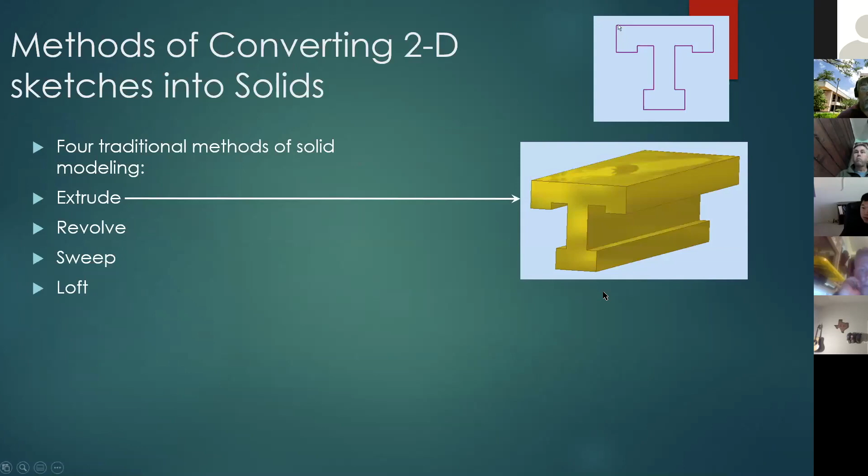With any solid modeling program - I don't care whether you're using Fusion, Inventor, SolidWorks, whatever else you might have run into - there are basically four methods of putting things together. Either you start off with a block T and just stretch it out straight, which is an extrude. You take it and swing it around an axis to make a revolve. You take it and let it follow a path to sweep things out. Or if you have two different shapes - you want to go from a block T to, in this case, a circle - you can use a loft function.

Probably that's in order of frequency that you run into things. Lofts are really useful when you need them, but there are not a lot of parts in the engineering world, at least, that require lofting. Airplane wings, boat hulls, things like that that are

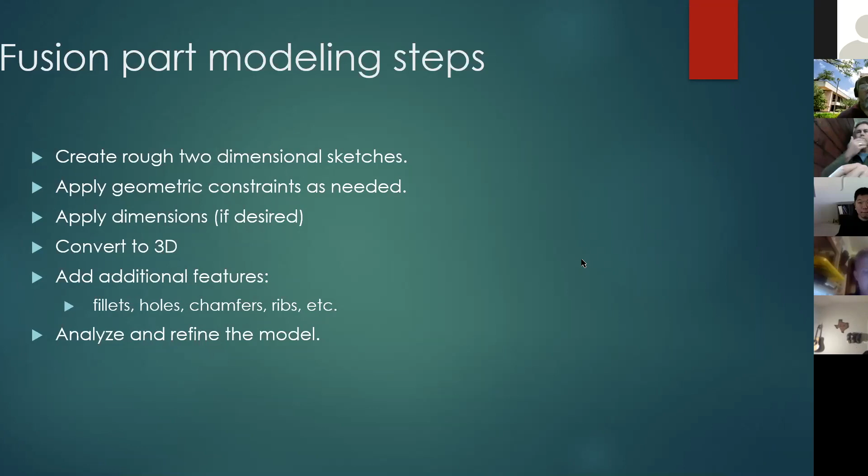defined by cross sections are your most common application for that. The way it works, you're going to start off in Fusion and you're going to draw that block T, whatever it is. You're going to draw a two-dimensional sketch and then constrain and dimension that so that everything comes up the right size. So it's a process of identifying this sketch, dimensioning it, constraining it, converting it to 3D, and then just building on from there, right? Adding more extrudes, revolves, drilling holes, filleting corners, whatever it may be.

So when you first start off in Fusion, you're going to look at what you're trying to draw and you're going to say, where do I want to start drawing this thing? Because I'm going to start with that two-dimensional shape and then extrude, revolve, sweep, or loft it. So where's the best place to start? And the answer is not always absolutely identifiable.

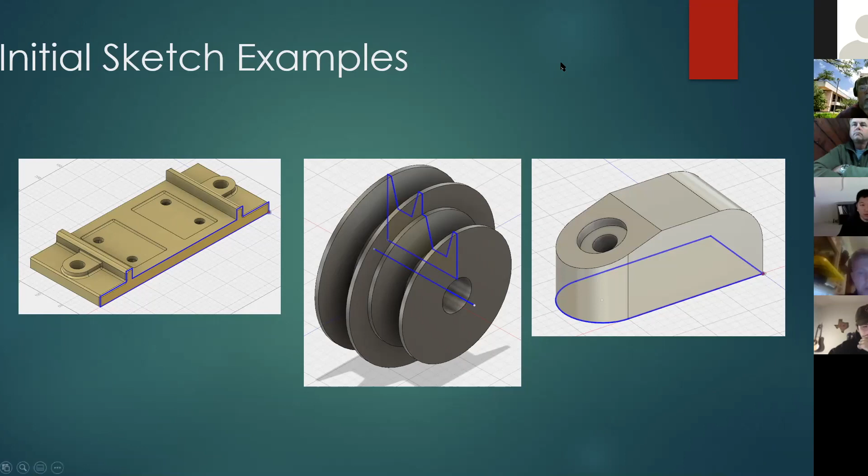When you get into Fusion, the first thing you're going to want to do is to start putting a sketch together, right? If we go over to Fusion, how far down is Fusion? There. If we go over into Fusion, the first thing I'm going to want to do is to put a basic sketch. So I create a sketch. This is the launching point for pretty much everything that you're going to do.

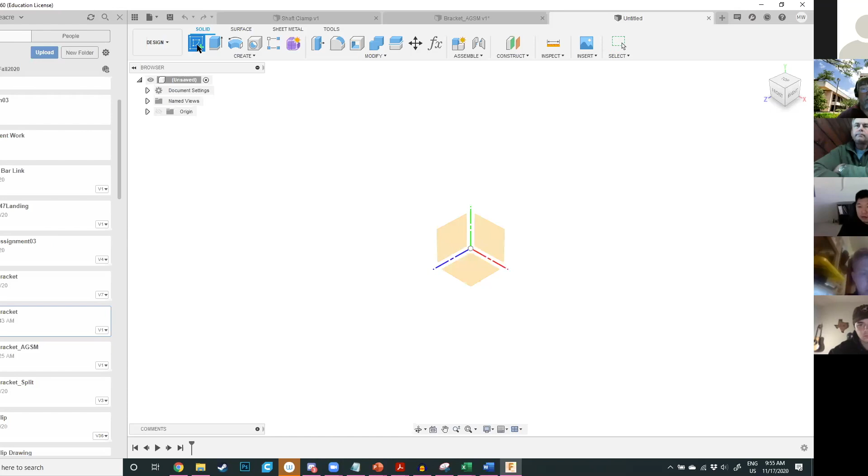You can choose what surface you want to start on. Fusion will allow you to sketch on any planar surface that exists in your design. Right now, there are 3 of them, right? The frontal, the profile, and the horizontal. And I can pick any one of those 3 to sketch on to do my initial sketch.

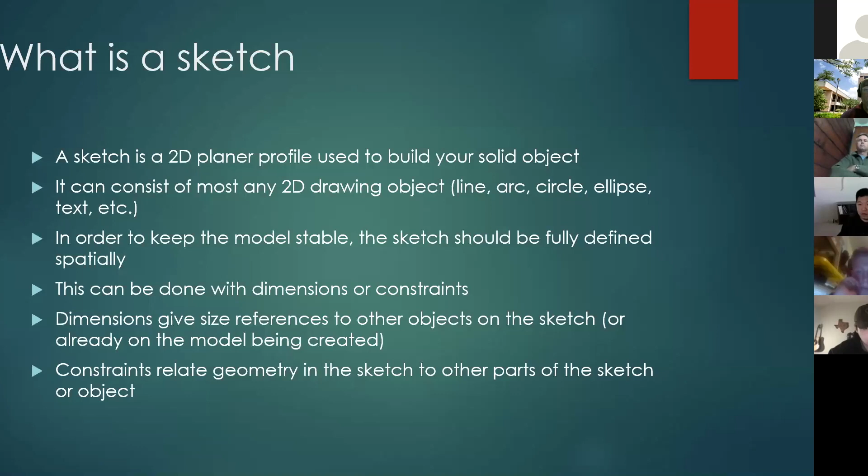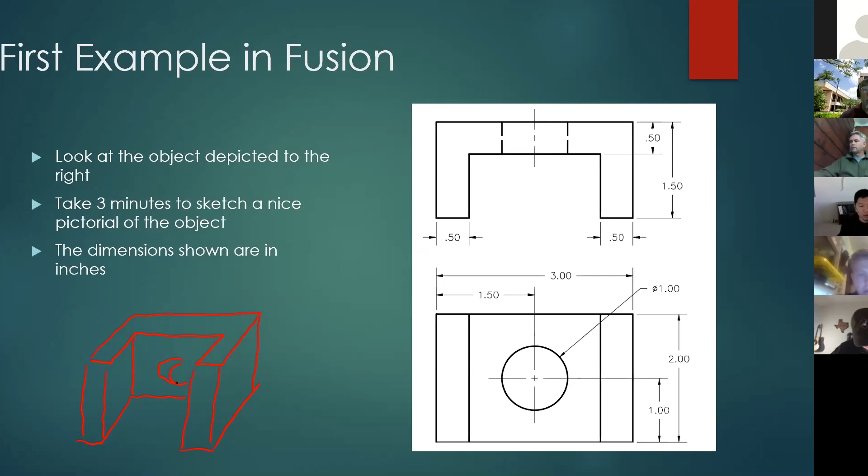So the question is, how are we going to get Fusion to generate that thing? So we look at this and say, well, where's the best place to start? In my opinion, the best place is the top view, right? So we're going to start off and look at that U-shaped region there in the top, drawing that thing out

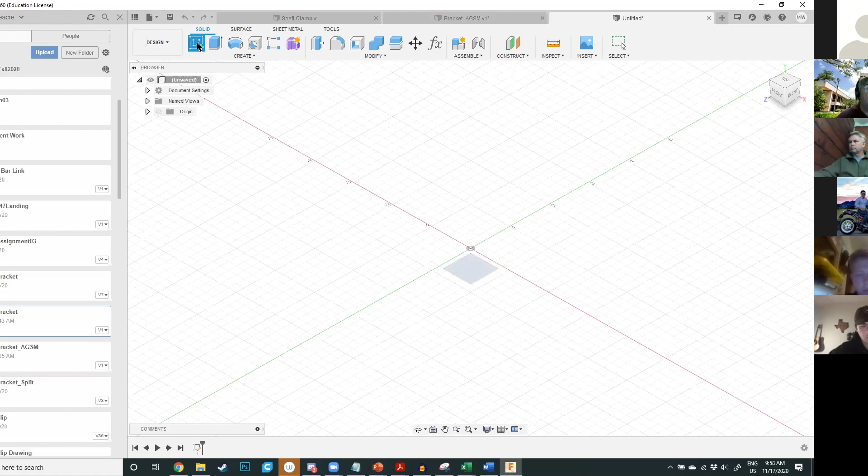with those dimensions. So we go over to Fusion. We're going to start a sketch on the horizontal, the top, right? Then we're going to draw lines that are depicting that basic shape.

And you notice I'm not trying to be real careful to make sure I drew it the right size. That frustrates some people no end. But the way a parametric solid modeling program works, once I get the basic shape, you'll see some of the lines are still blue. Those are not well defined.

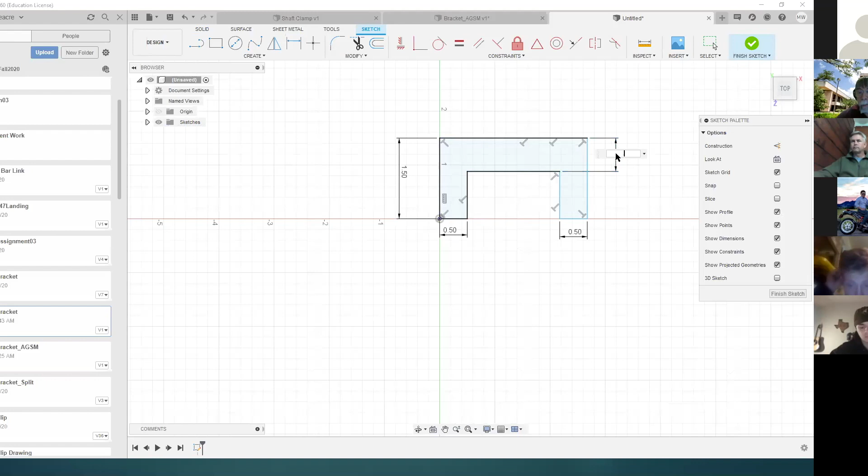I can add dimensions and say, well, gee, this thing was supposed to be 1.5. Now it knows where that top line is. This was supposed to be 0.5. This was supposed to be 0.5. From there to there was supposed to be 0.5. And the overall size right there was supposed to be 3.

It looks like it's all well-defined, everything is happy, and you know exactly how big it is. And you check for things, and all of a sudden you notice there's this one blue line down here, because no one told it where that had to line up.

I can either go in and put another dimension on this side and define that also as 1.5. Or I can come in here to my little section called constraints and tell Fusion that I want 2 lines to be on a line with one another, collinear between this one and this one. So they'll all line up at all times.

That gives me a basic sketch. It's just a U shape, 1.5 by 3 with 1/2 inch edges. Once I've got that sketch done and I'm finished with it, I will finish my sketch.

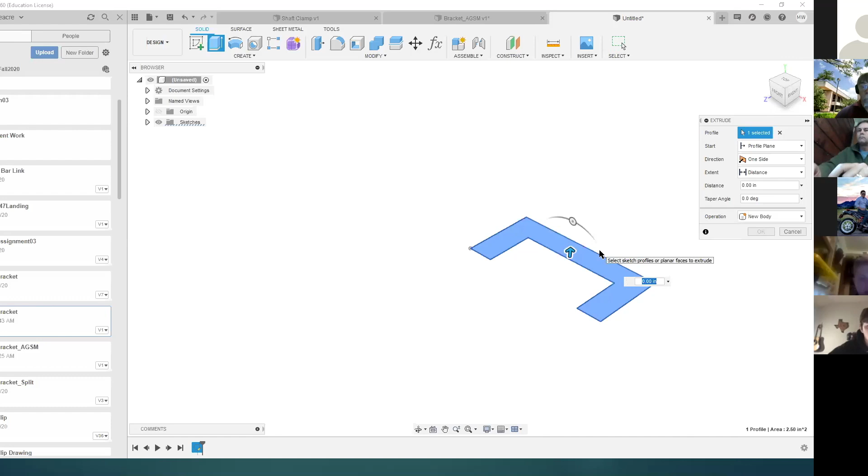My operations for turning things into 3D objects, there's extrude, there's revolve. Others exist underneath here. If you drop that down, there you can get sweep, loft, rib, web, etc. But if I just say extrude, bring that thing up 2 inches, drag these pretty little pictures out of the way where I can see what I'm doing, and say, okay, I've got the basic structure of that U shape.

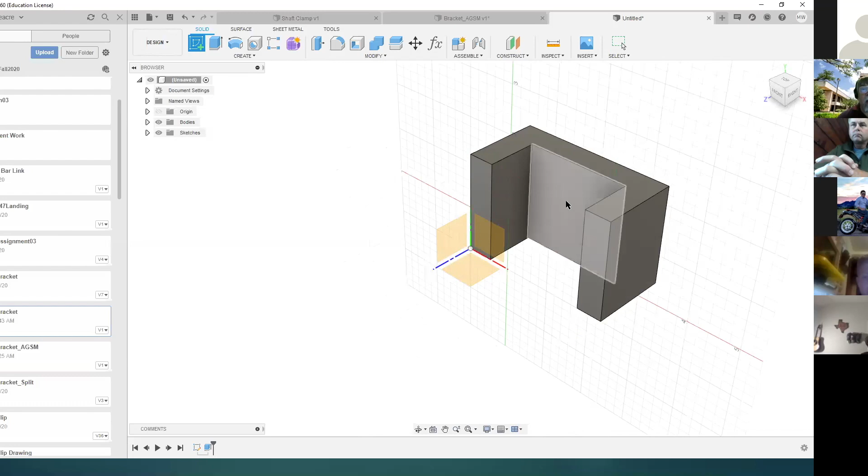I say, well, okay, that's taken care of. Now I want to drill a hole. There is an actual tool to make holes. For the moment, I'm going to skip over that and just do this as a second sketch. I'm going to create a secondary sketch. I could use any of those 3 standard surfaces or any of the existing surfaces in my object. I want to use the back of this block.

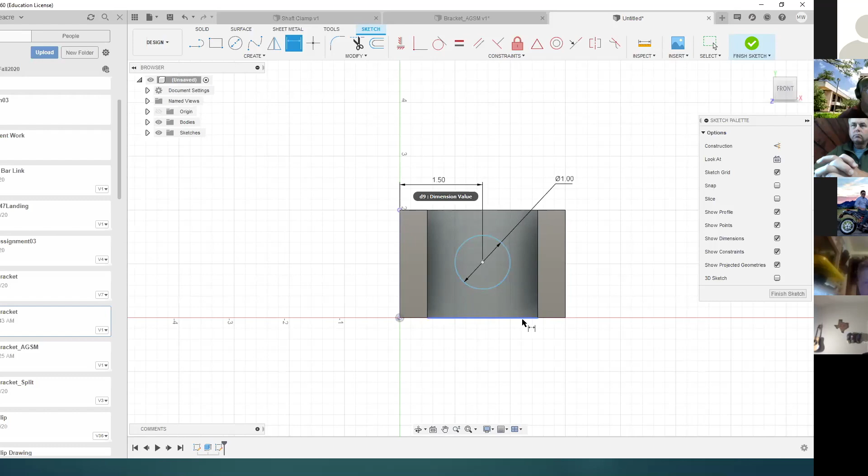I want to draw a circle on the back edge, dimension it at diameter 1, from one edge to here should be 1.5, from the bottom to the circle should be 1, and I've now centered that on that back face. It's black, everything is well defined. I finish that sketch.

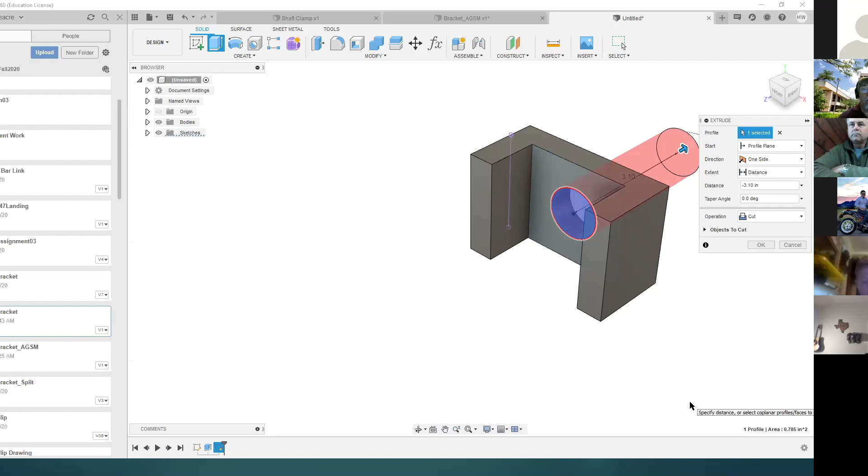I extrude that circle. If I were making a post to stick out of it, I'd bring it out this way. If it's to be a hole, I bring it out the other direction. Fusion is generally smart enough to know which one you mean. If for some reason it gets confused, I can change the operation from cut to join and turn it into a post if necessary. And then say OK. And that's your basic object. That's your first drawing in Fusion.

Fusion makes it very easy to go in and do things. If I take a second and kind of look around, on my left here, I've got what's called the browser. Each thing that I sketched shows up as a separate entity on the browser.

So if someone came in and said, hey, that 1-inch hole was supposed to have been 1 1/4, if I double click on sketch 2, I can double click on my dimension and it enlarges the hole. If someone comes back and says, well, gee, it was supposed to have been 2 inches deep instead of 1 or 1 1/2, I can change that.

I have access to all those dimensions. So later on, when someone comes and says, you know, you got that wrong, you don't have to say unfriendly words under your breath about them. You can just say, oh, fine, I'll take care of it, right?

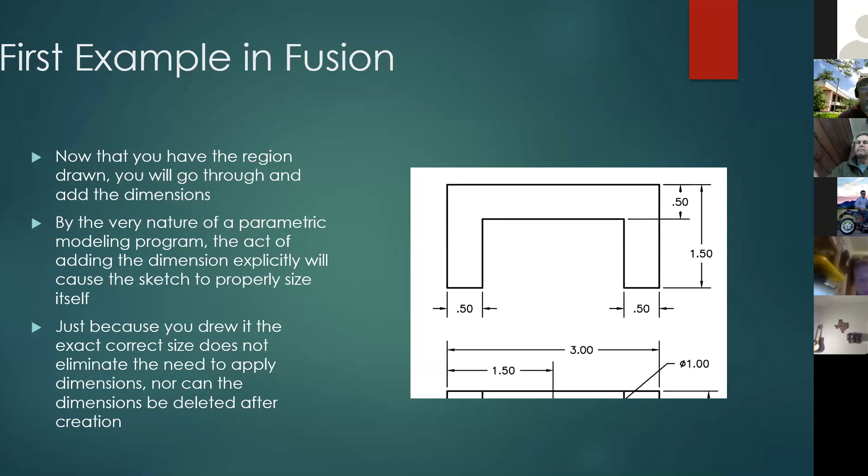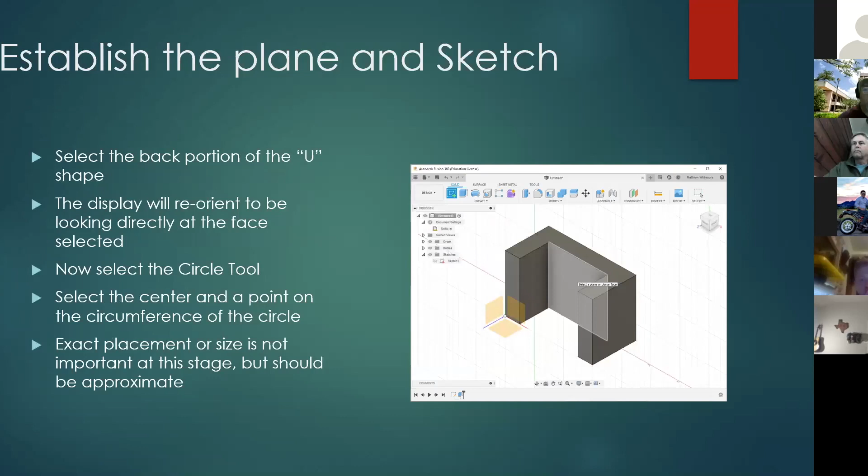That's your first part in Fusion, right? That's how Fusion works. Right?

If you want to interrupt, I vaguely watch the chat, but I have no objection to someone unmuting and saying, Mr. Whiteacre, could you? So feel free to interrupt me. This is a 400 level class, so you all have been here a while. You understand the concept. If you let a professor get up a head of steam, you'll never get a word in edgewise. So feel free to try to interrupt me if I lose you somewhere.

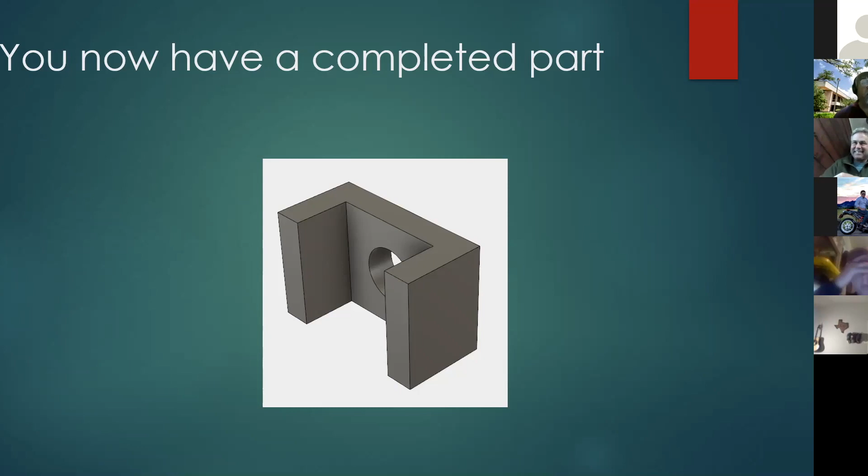So Matt, how would you display the dimensions on that? I mean, that's a beautiful drawing. If they want to display that with the dimensions shown, how would they do that? That's about 10 or 12 slides down the presentation. Excellent. So if you'll hold the question, I've got the answer to that. You have to go into a separate mode and create a drawing of it. Right. Oh, it's not even 10 or 12. It's next, drawings from 3D models. I thought I had one more example in here.

But as Colonel McGee says, how would you actually turn this into something that's useful for a drawing? If you've got this thing built in 3D, but you want to put it on a sheet of paper, which is 2D, I suppose you can always do a screen capture of that object and paste it in a Word document and make a pretty picture. But that's not really a technical drawing, and it doesn't show you the dimensions and all that good stuff. So we talk about creating drawings of it. There is a whole separate mode to create drawings.

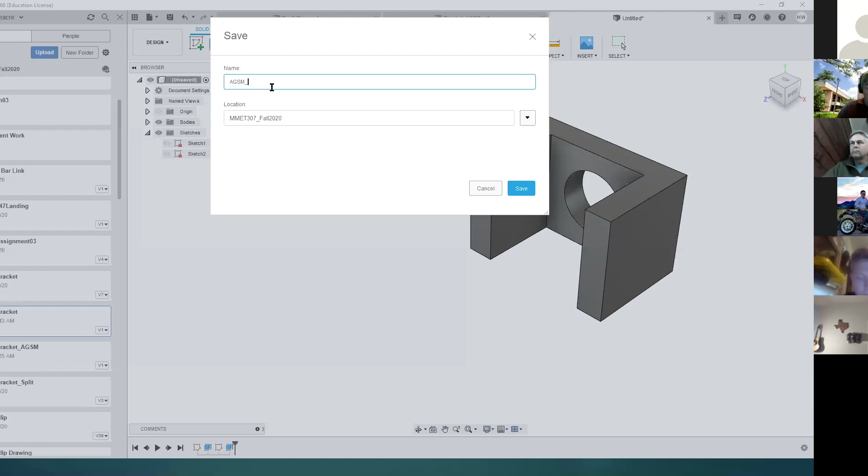Once I've got my part modeled, if I go into drawings, I have two choices. One is from the design space right here on screen, or there's an animation mode: if I have an assembly and I want to explode components, I can explode them and do an animation. We're not going to see that today. I just don't have time. But if I do from design, oh, it requires it be saved first. Save your part as something or other. Then it'll let you make a drawing of it. Either what's visible, select what you want, or do the whole thing. It doesn't really matter.

What standard do you want to use? ASME, American Society of Mechanical Engineers, is pretty much the American standard for how you're going to arrange top, front, right side views. ISO is the international standard. ASME uses third angle projection. ISO uses first angle projection. It depends on who your target audience is. I'm used to working ASME, so that's where I'm going to set it. What units do I want to use, and what size page do I want? 8.5 by 11, whatever. And say okay. And Fusion's going to buzz and whirl for a minute.

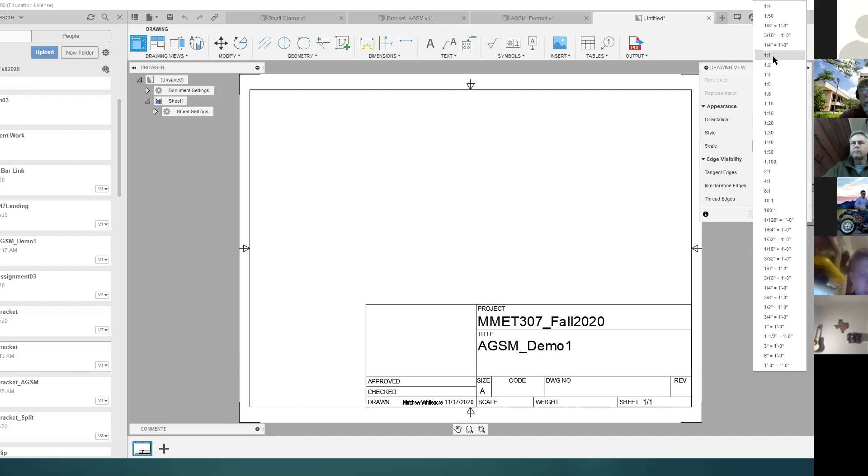Bring up a sheet of paper, draw a border with a title block on it. Bring your object up and say, where would you like to put this? If you go, well, I'd like it a little bigger, a scale of 1 to 1, or a little bit smaller, a scale of 1 to 4, I can control what scale this thing's going to be drawn at, where it's going to go, and then just say okay. Fusion creates that view.

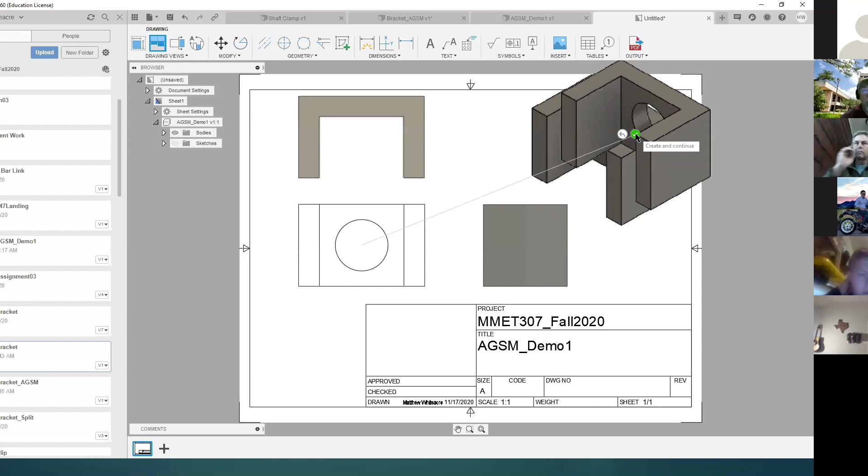A second view is a projected view. So I go into my projected view, I click the parent and say, bring one up here, one over here, and a pictorial out there. I made it bigger so it's not going to fit so nicely, but that's okay. Click the check mark or hit the enter key, and it will generate those views. Fusion is smart enough to know when something should be a hidden line, when something should be a visible line. It unfortunately assumes the pictorial should also be visible and hidden, and that's not very normal.

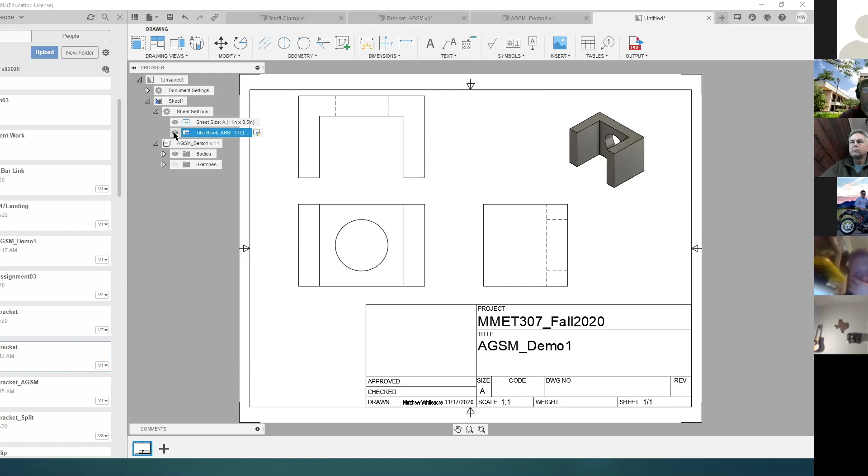So you probably want to right click and go into edit view, edit the pictorial and say, let's make that one shaded. Or if you like line drawings, make it a line drawing, but don't show hidden edges. And since it's a pictorial, I can scale it independent of the orthographics, and then everything fits. If you don't want to show your title block, in sheet settings the little eyeballs turn things on or off. I can turn off my title block or on.

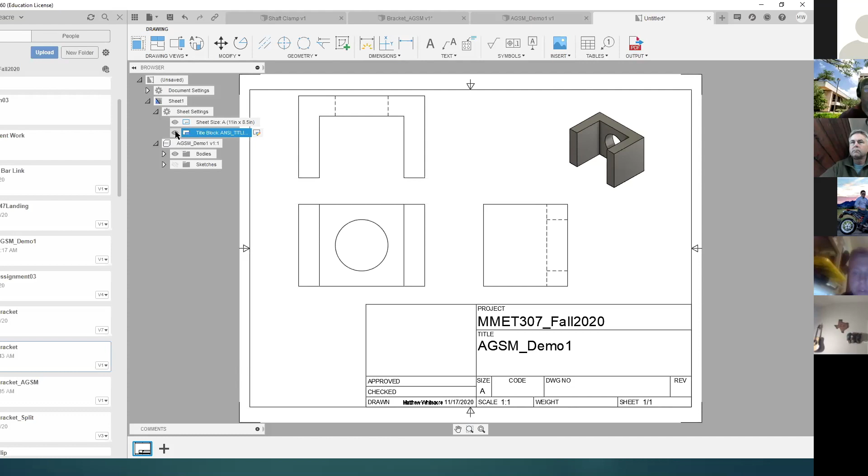If you want a totally different title block, it's a bigger hassle. You've got to go in, create your title block, save it, and make a template. So generally, if you're illustrating things that you're likely to cut and paste into reports or PowerPoints, you can just get rid of the title block and not worry about it. You can also get rid of the border around it if you don't like that.

I can drag the views around. It will never let them get out of place. To add the dimensions to it, there are a lot of times that the dimensions you use to build the object may not be the ones you'd like to display on the final version. So you're ending up doing sort of double duty.

I'm redimensioning the object, saying, okay, from there to there is 2, from there to there is 0.5, there to there, 0.5, there to there, 0.5, corner to corner. And I'm just applying my dimensions one by one. The overall height of this thing. I can still reference the circle, either the quadrant or the center.

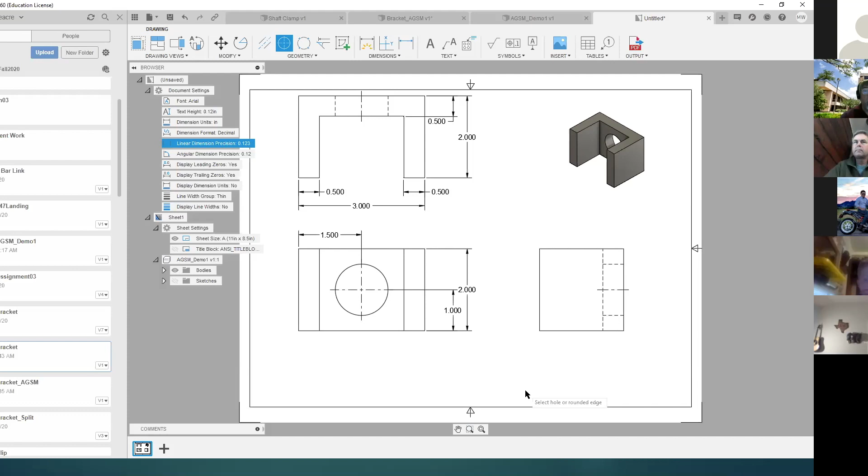Then I can create a PDF file, or I can create an AutoCAD file. Sometimes Fusion is a little sloppy in its drawings. It doesn't always draw center lines with dashes. It has other issues here and there. Why in the world one company, Autodesk, has the premier 2-dimensional drawing program in the world, AutoCAD, and they can't embed that drawing engine in their 3D program? I don't know, but they don't.

So sometimes you have to save it out as AutoCAD format and then bring up AutoCAD and make final cleaning edits. I don't like it. That's the one reason I hemmed and hawed about teaching Fusion for a number of years. But they've gotten better, so I can do a lot of the edits here, so it's not so bad.

If I go back to my design and say, well, you know, that 1.5 is really what I wanted. Once I save this, if I go back over to my drawing, it'll have a little exclamation point up here in the top bar that says, hey, things are not in order with one another. If I click on that, it says, all right, update my views. And it recognizes I changed that width or depth, and it updates it to 1.5.

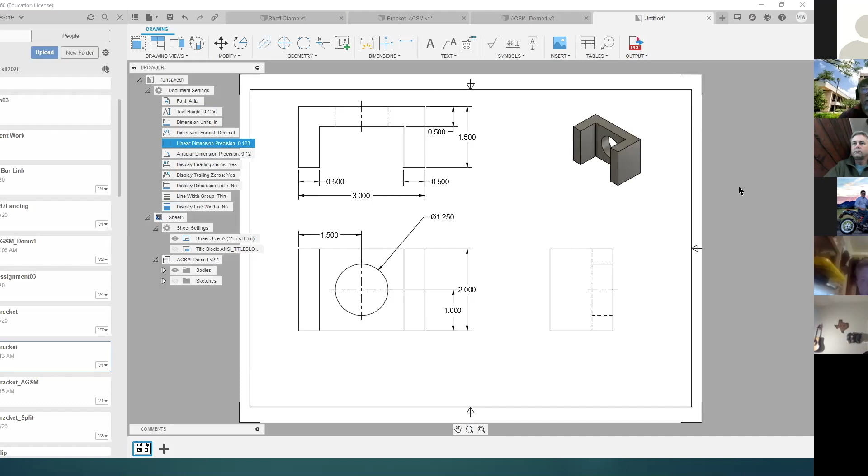I can add radius, diameter, angular, or whatever. So if I want to give the diameter of the circle, I say diameter, circle, and put the diameter up there. Output a PDF file, open it once it's been output. Sure, save it there. And now I've got a PDF file of my drawing.

Center lines, okay. Again, this is the whirlwind trip through Fusion, and I understand that. Anything I should talk about, go over, etc.? All right. Anybody have any questions? So again, feel free to ask. That's a legitimate request. I'm not just saying that as lip service.

You may have went over it, but if you were to convert it from, say, inches to metric or metric to inches, what would you need to do that? It depends on what question you're really asking. I want to go to Fusion. If your question is, when you first drew this one, you messed up badly, and that was supposed to be 1.5 millimeters by 3 millimeters.

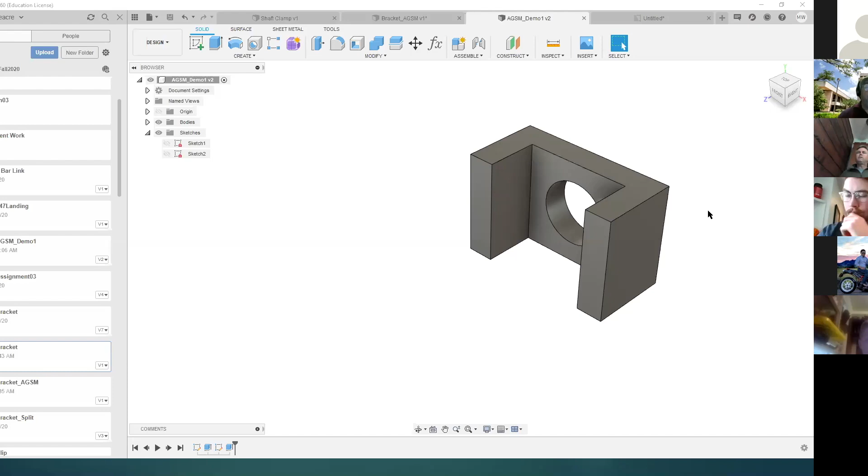There is a sort of kind of cheesy workaround, where is it, scale right there. You can scale an object up or down by 25.4. That's a cheap hack, and the problem is, if I do scale my drawing and then say, well, now I've got to edit it, you've got to worry about, are you editing into the new units or the old units, and you'll get terribly confused.

If your question is, when I did my drawing, my dimension units were set to millimeters, and so even though I said it was 3 inches wide, it says 76.2, then I just have to change this dimension units entry right there and change it over from inches to millimeters or vice versa. But that's predicated on it having been drawn initially at the correct size.

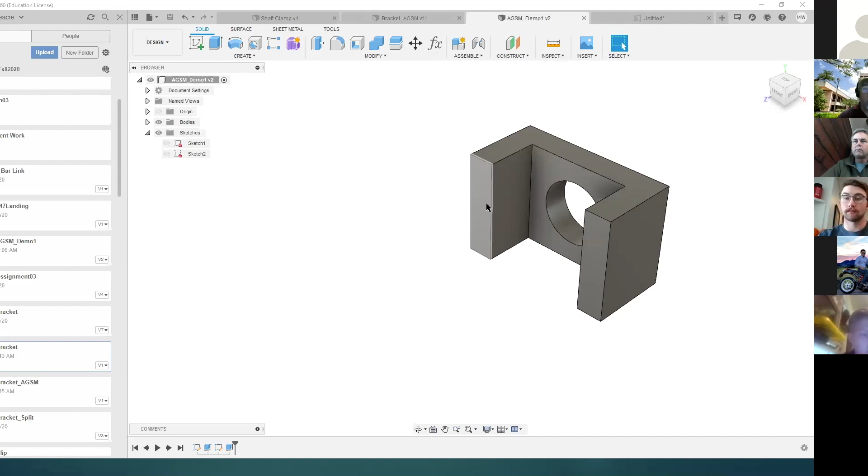If you drew it in the wrong system of units, you're kind of hosed. It doesn't work real well. That's one you've got to be careful about, because if I'm editing this first sketch and I tell somebody, hey, I want this to be 12 millimeters, Fusion's fine with letting you type out units. It'll default to, in this case, document settings, which are set to inches. If I want to set my document to something else as the default unit, I can, but I can always override it by typing things in.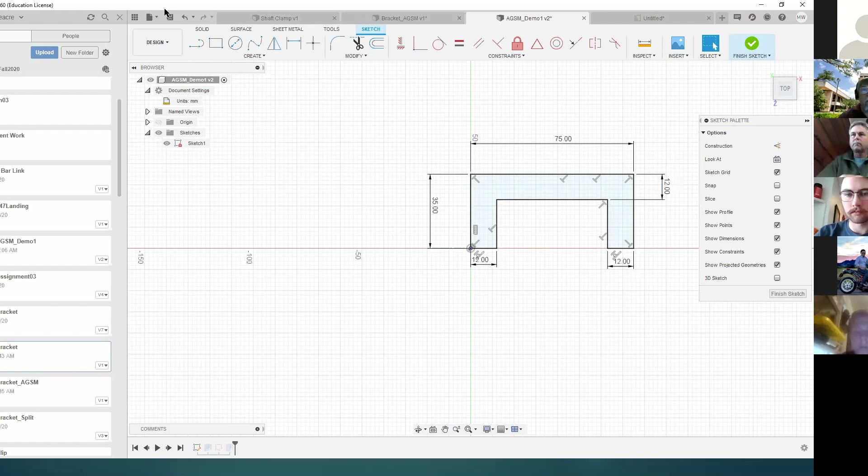So if I wanted to make that 35 by 75, 12. When I save that, go over to my drawing, update my views, the inch numbers are going to look really weird. Come on. Update.

Why did my computer lock up? I don't know why my computer decided not to redraw my object. Oh, because I didn't finish my sketch. You've got to get out of the sketch mode, then save it, then update.

But now if I change these units over to millimeters, they'll look like nice numbers. I don't know if I beat around the bush long enough to answer the question or not, but that's what you'd have to do. And again, I didn't edit all of these down here to be normal, just that view. Okay.

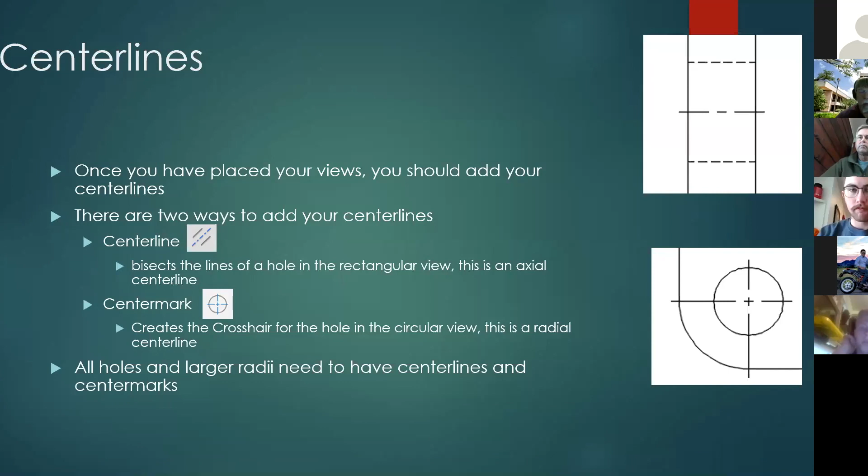All right. So what about assemblies? That was one pretty part, and it's nice and good and all that. But what if we're talking about putting together multiple parts to make an actual working mechanism? Right? Fusion, if you were looking at what it was doing a second ago in the model over here, creates things called bodies, and a body is just simply a single chunk of material. Right? It by default always does that.

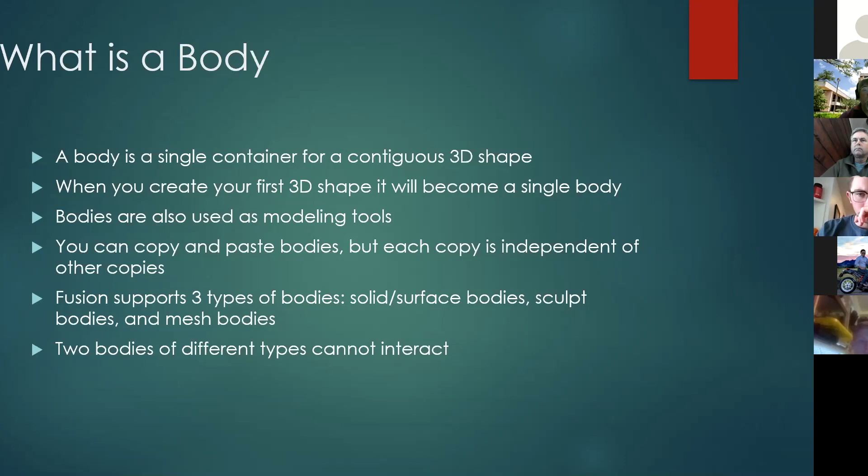But if you're starting to put assemblies together, bodies really don't assemble. I can kind of explain it, but it's kind of weird too. But there is another thing called a component, which is actually a container for a bunch of bodies that make up a single thingy. A ball bearing has a bunch of spheres in it. It's got one side, it's got another side, but it's got multiple parts. A jet engine could be a component. It's got thousands of internal components.

The trick is when you're putting together assemblies of multiple objects, each thing has to be a component. So when you do that, you have to tell Fusion, hey, I want to build a brand new component to put this thing together.

So if I'm trying to do this object, just a nice, simple little two-piece clamp right here, it's going to have actually 5 components, or 6, I guess, because there are 2 nuts as well. But 2 components that you have to worry about drawing, and then we'll talk about importing the nuts and bolts. But I've got 2 custom parts that I need to be able to draw. One's going to be called the upper saddle. One's going to be called the lower saddle.

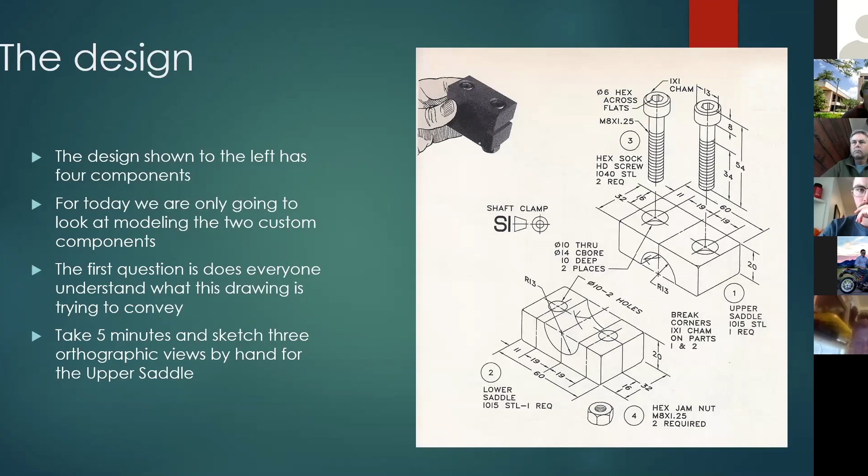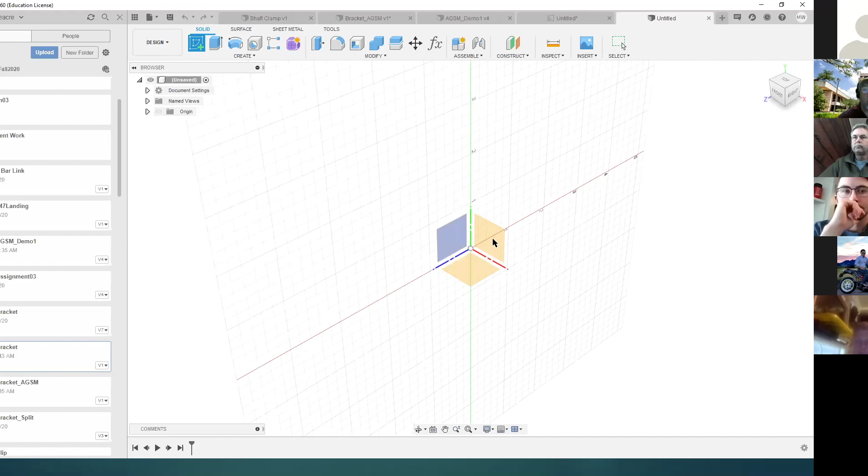So if I go in and say, well, to do this thing, I need to be able to create those components. So let's start with the upper saddle and draw that. So I'm going to go into Fusion, create a brand new drawing, put together a sketch on this surface. This one happens to be in millimeters, so I'm going to change my active units over to millimeters.

And I'm going to put a circle on here. If you'll notice, as I get close to this line for the center, it locks on. And if I slide it farther, it eventually grabs the midpoint. And I get that little triangle showing there. That tells me Fusion has located the center of that circle at the exact center of that line.

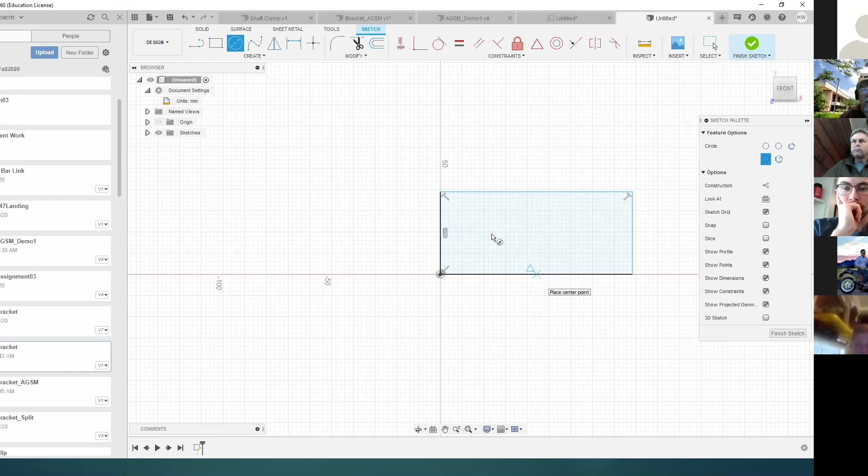Now I can add my dimensions. I've got mine. 60. And I've got my dimensions on this thing drawn. Because that circle was centered, I don't have to worry about dimensioning it to be in the center. It just stays centered.

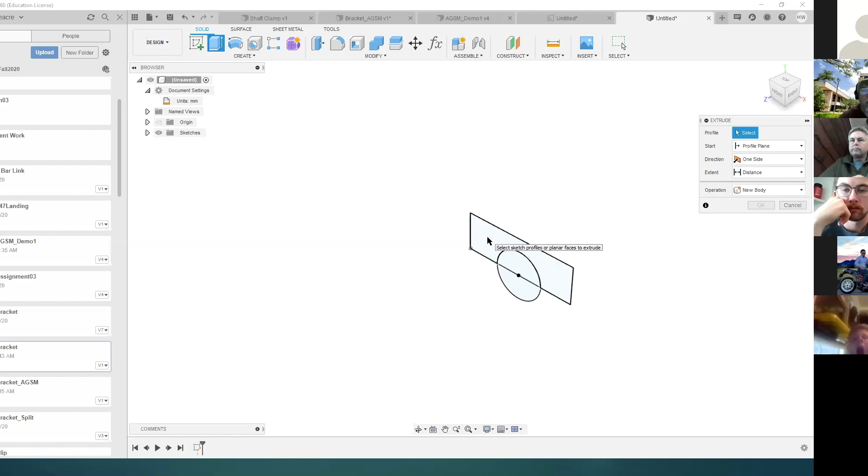You're like, yeah, but you've got extra lines and part of the circle, it's kind of ugly. If it really kills your soul, there is a trim function. The reality is no one cares, and sometimes extra geometry is useful. If I finish that sketch and say extrude, I can extrude this portion or this or this. So I can pick what piece I want to extrude and bring it forward.

Just the basic shape of that upper saddle. It's got some holes drilled in the top of it. Put a sketch on the top.

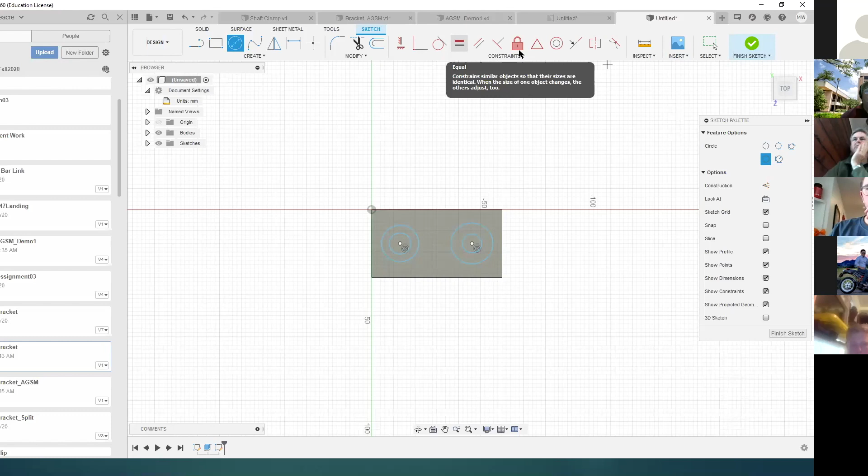I should know by definition, using a constraint equal, that the 2 holes, click, click, are equal, and the 2 counter bores are equal. And I can add a horizontal so that those 2 centers stay directly in line with one another.

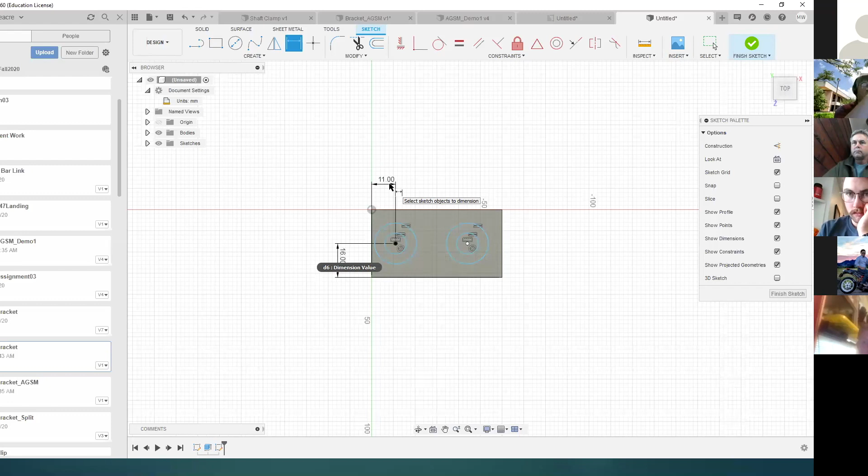Now it's just a matter of adding my dimensions. From there to there is 16. From there to there is 11. I cheat because I've got the drawing sitting right down there so I can look at it. From there to there is 11. This outer circle is 14. The inner circle is 10.

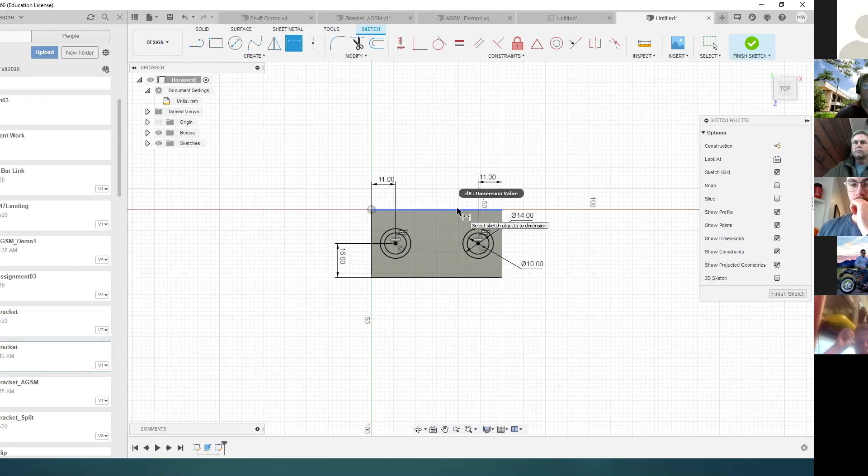Just adding that information, it's now well defined. Since I told them these sides are equal, once I get sizes on one side, I've got sizes on the other side. But I have a problem. When I finish this sketch and I say extrude, I can indeed pick the two little ones and punch holes through. But it doesn't do anything with the big ones.

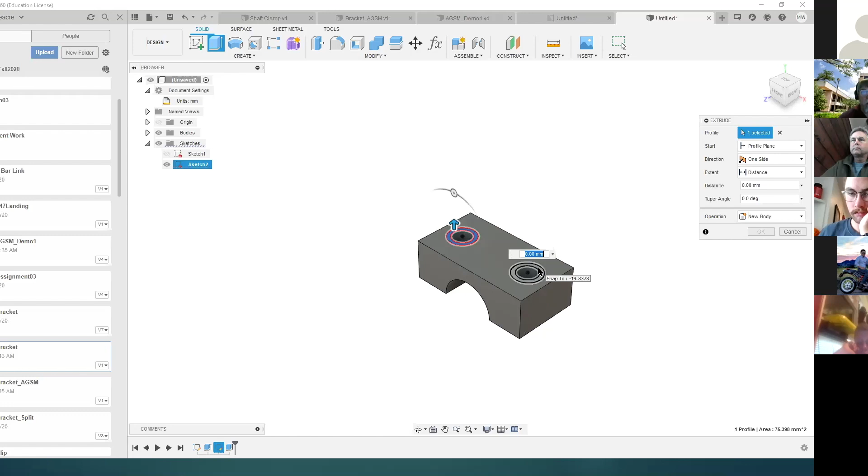So I've now got to use a two-step process. I'll punch those holes all the way through. And you're like, well, but I can't use my other circle. Well, you can. It's under sketches. I can turn this sketch back on again. And now I can extrude that little annulus and that little annulus downward, -10. And I can turn off the sketch if it's annoying to look at it. That's my basic part.

Problem being, I didn't make a component out of it. I didn't because most of the time people forget the first time. I do, however, have a body out of it. And if I right click, I can tell Fusion, hey, now that I've messed up and didn't do this ahead of time, let's create a component from this basic body. I now have component 1. I can slow double click on it. Call it upper saddle. I still have sketches 1 and 2. They're still available. But everything for that's contained in the upper saddle.

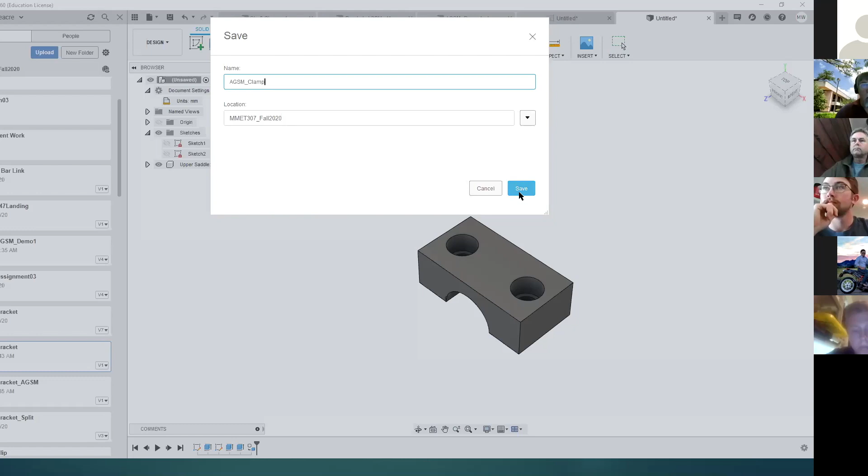Now, if I'd been doing this thing right to start with, I'd have gone up under the top. Actually, probably right now I should save this thing and call it, let's do it. Save it. If I right click, I can tell Fusion, start out with a new component, just right off the very beginning. We're going to call it lower saddle. Build that. Now my upper saddle grays out. I'm working on my lower saddle.

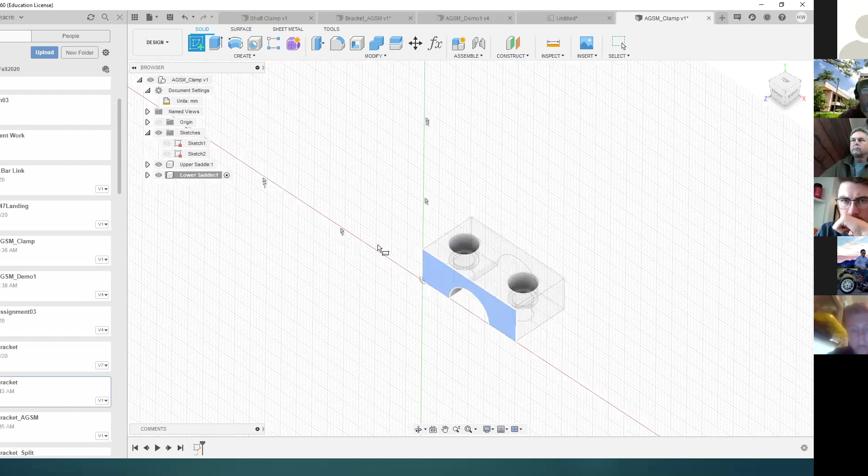I can put a sketch, but all of the upper saddle is still available. I can put a rectangle. Dimension the rectangle so that it's 20 tall. Do this geometric thingy saying collinear, saying I want things to line up, and line up this edge with this edge. And now, should I go back and edit my upper saddle, my lower saddle will change too.

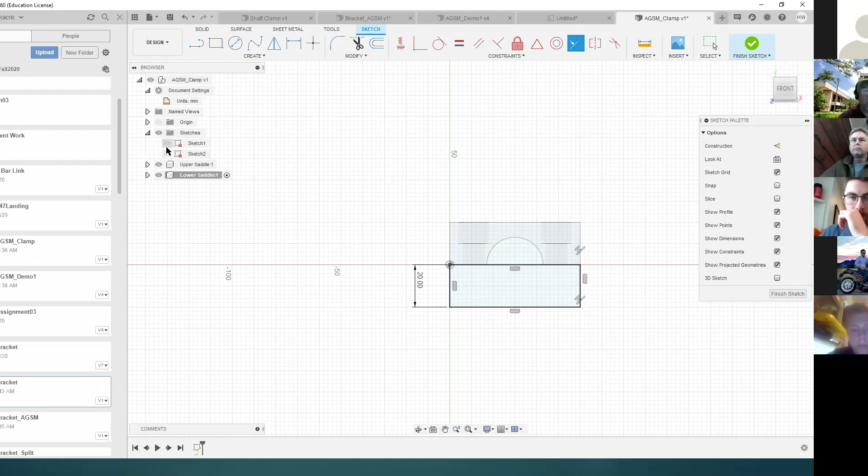If I turn back on my sketches, I can say, hey, let's project this circle from the other part into this part. So now when I do my extrude, if I edit something up here, the changes will apply to both parts.

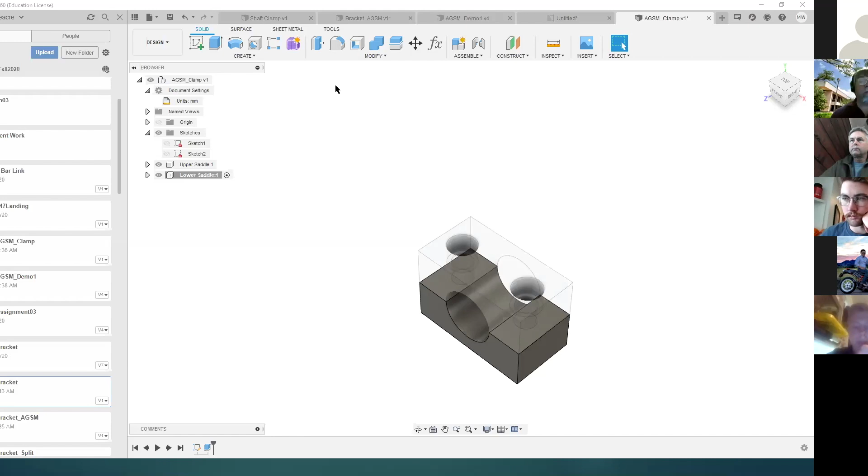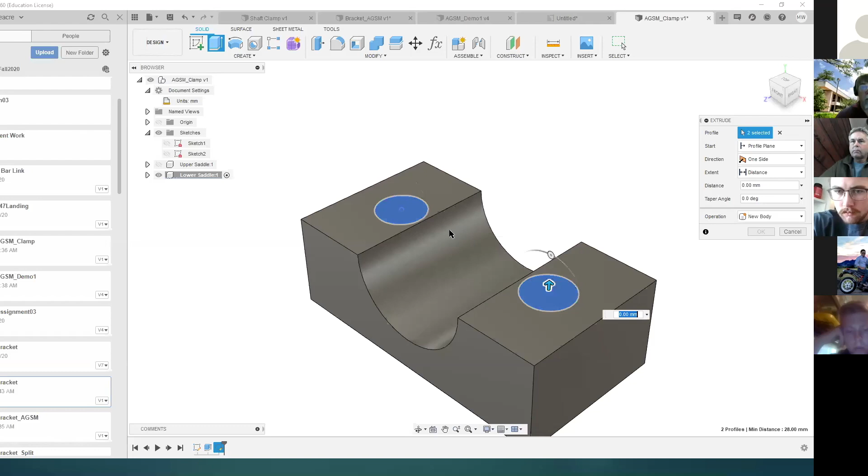I can also go through and say, well, all right, I know I've got to drill some holes in here. Let me create a sketch on that plane right there in the middle. Once again, I'm going to project the little hole and the little hole. So now I've got those circles drawn. I can extrude, turn off the upper saddle, that piece and that piece out the bottom end. Turn back on my upper saddle, click the little radio button to the right of the main part, AGSM clamp.

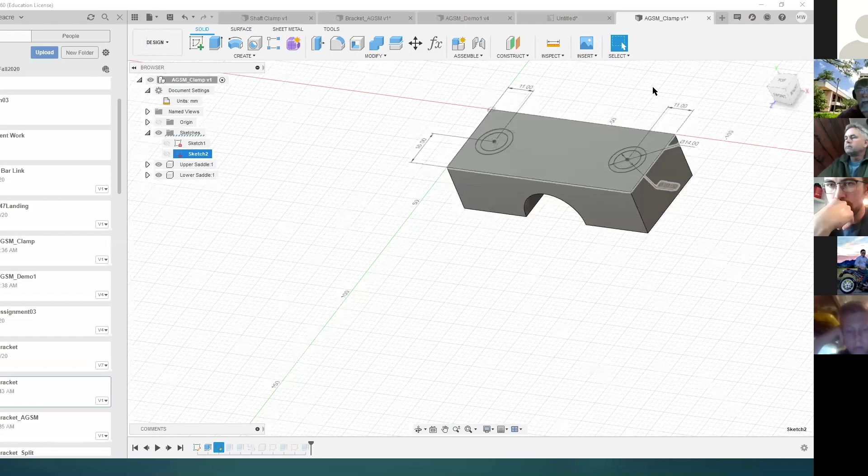And if someone tells me, hey, you know that thing? It was supposed to have been 80 wide. I'm like, fine, it's 80 wide, top and bottom, everything lines up, everything's done. Right. Those holes were supposed to be 16 in. This thing should have been diameter 30. Everything updates and keeps everything balanced and in line with one another.

Now I got my two basic parts. What about the other parts? What if I want to bring in my nuts and my bolts? Fusion has the ability to insert components from a company called McMaster-Carr. It's a really big parts manufacturer, seller, retailer, whatever. And they've made their entire catalog available to Autodesk for us to be able to import.

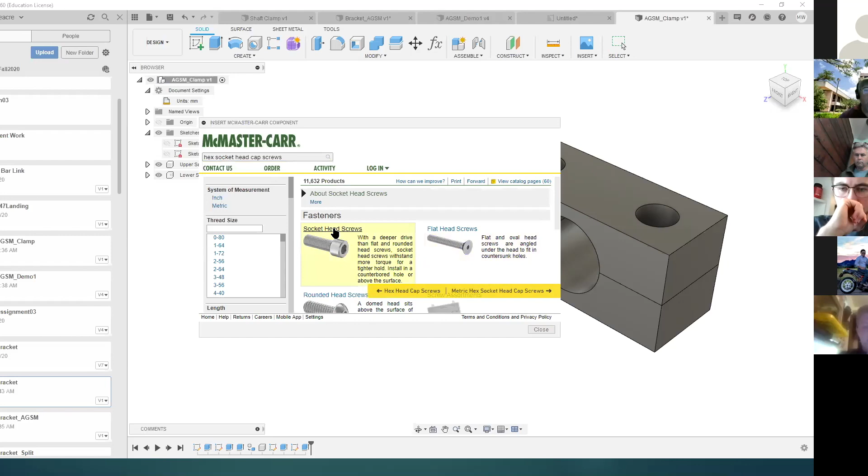And all you got to do is say, well, I'm looking for a socket head, hex head socket cap screws. One of these thingies. It's metric. It's an M8, metric thread, diameter 8.

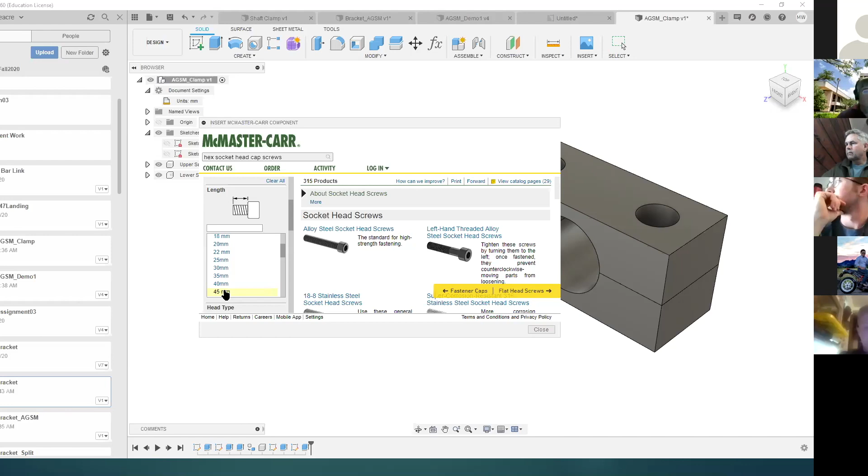It's 40 some odd long, 45, probably 45 long. And you just say, all right, well, what exactly do you want?

Eventually you go down and say, well, all right, this one looks good to me. Okay, slide over. When you click on the part number and go into product details, Fusion will let you insert that drawing, and usually step files work the best, but say save. Fusion will go through, think about it for a second, and come back and stick in your drawing.

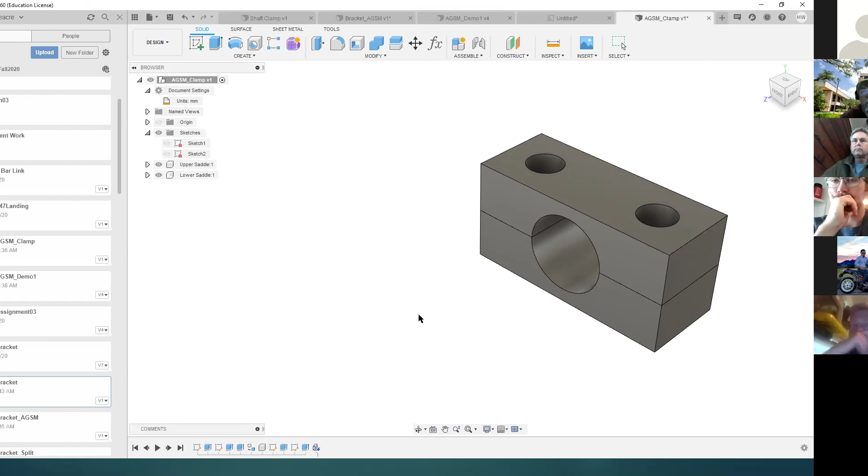That part, eventually, there, it'll stick that part in your drawing. I can right click, copy that part, right click, paste that part, and I got two of them.

They're not in the right place yet. We'll deal with that in a minute. Insert, McMaster-Carr. I just go nuts, hex nuts, metric, M8. Find which one you're interested in. Product details. Save as a 3D step.

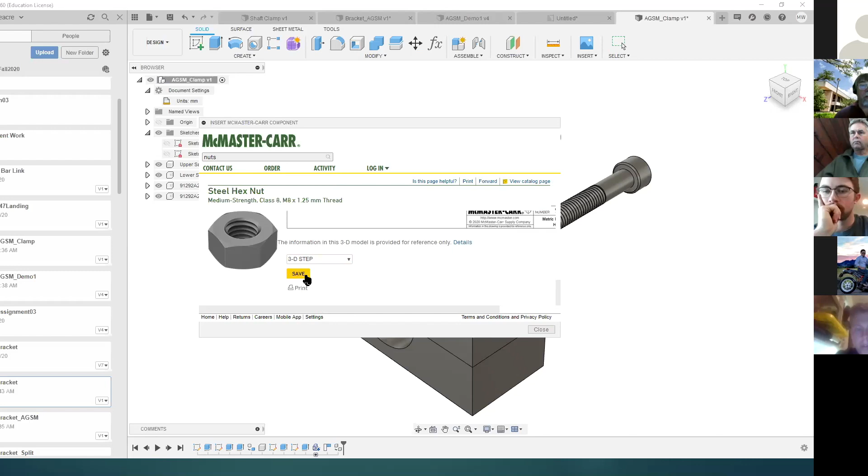Okay. Right click, copy, right click, paste. And now it's just a matter of putting them all in the right spots.

When you're working with things, each component is free to drag around wherever you want it to. If I capture position, it says, remember where I drug those to. If I say, hey, revert, it's going to put them back where they were. I like these two where I put them. I don't want to drag them apart.

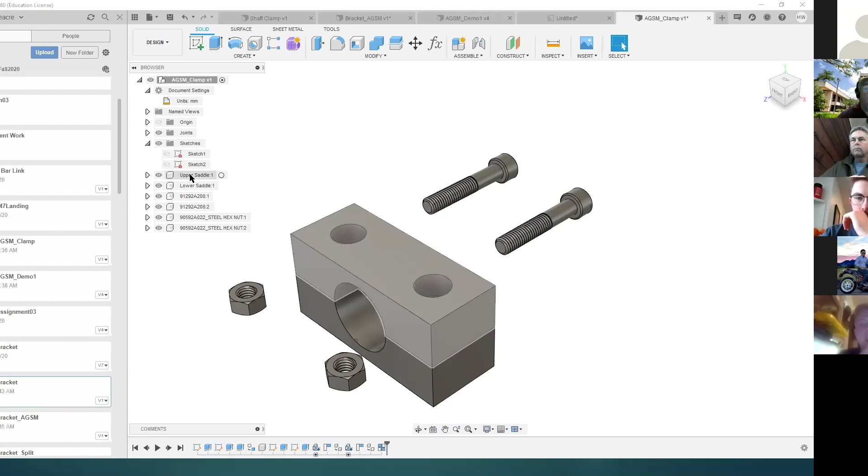So I want to tell Fusion, take those and make a rigid group out of the upper and lower. Now I can't separate these two. These two are stuck together. If I also want to set it where they don't move around at all, I can right click on one of them and tell it I want to ground that part. Now I can't drag these at all. I can just drag these along.

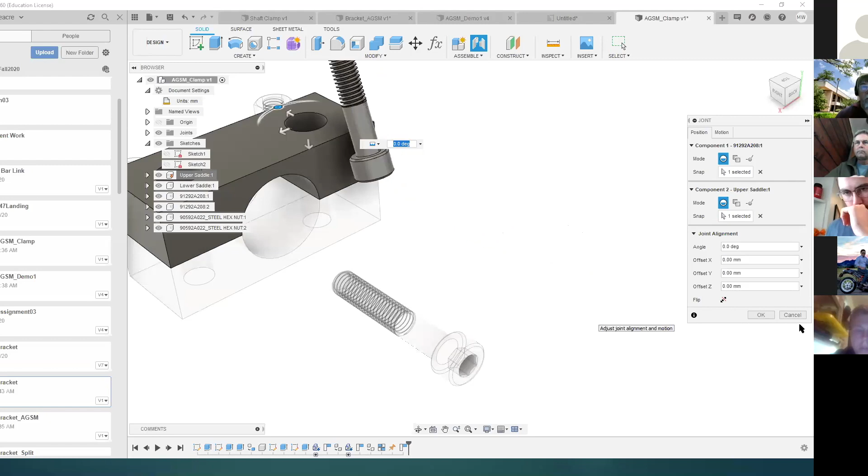All right, to assemble them, I use things called joints. Joints take points on one item, things. It says, all right, I want to take the center of that circle and put it at the center of that circle. Oh, and let's flip it upside down while I'm at it. I want to take the center of that circle, put it at the center of that circle. Oh, that one came up right side up.

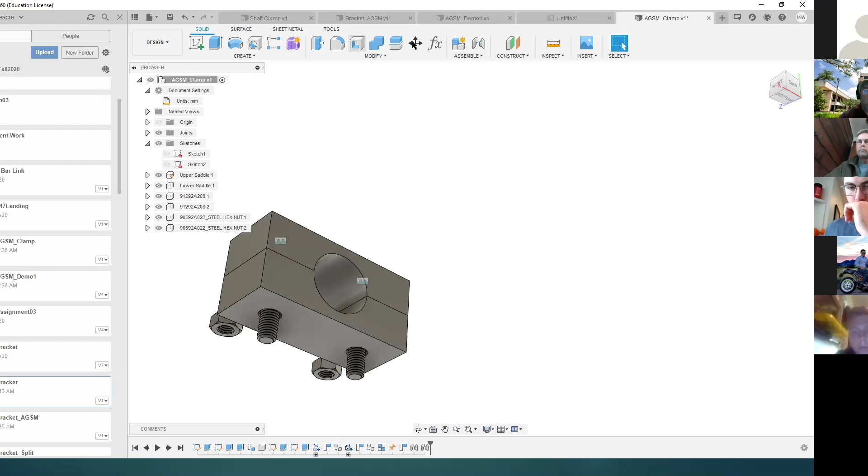I want to take the center of that to the center of that. Flip that one. I want to take the center of that to the center of that. Now I've got an assembled working object.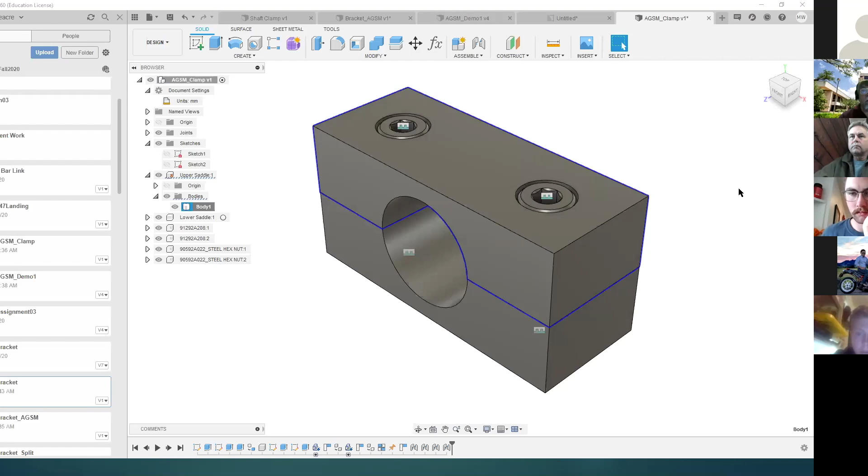If I know that these bodies, oh, these are made of steel. If I know what material this is made out of, I can change the physical material and select from a bunch of things. Blue anodized aluminum. Red anodized aluminum. I know that's not what the part's called out as being, but I can change the material of these parts. I can scroll this around or whatever.

My joints can be turned off where I don't have little blemishes on things. And now I've got something that is vaguely ready to screen grab and paste into a report if you're trying to talk about this particular clamp. Now, that's about 20 or 30 slides.

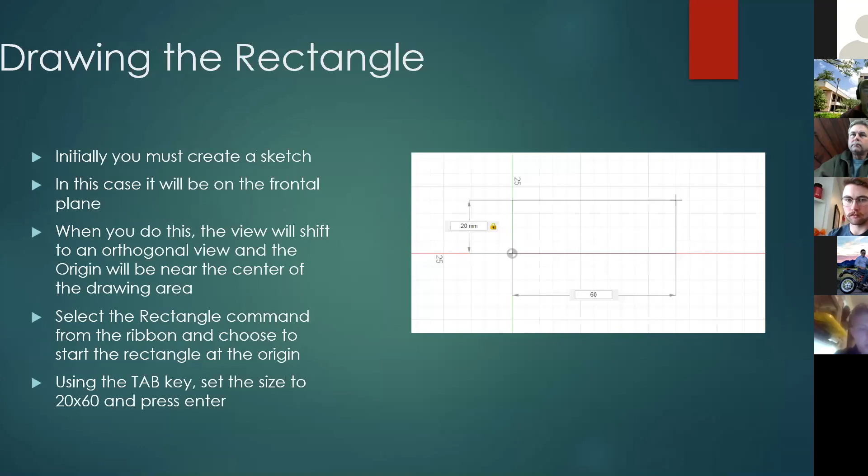Like I said, the PowerPoint slide, or presentation, is really long, but a lot of it is what's going on here. All right, what I did with joints is I just made everything rigid.

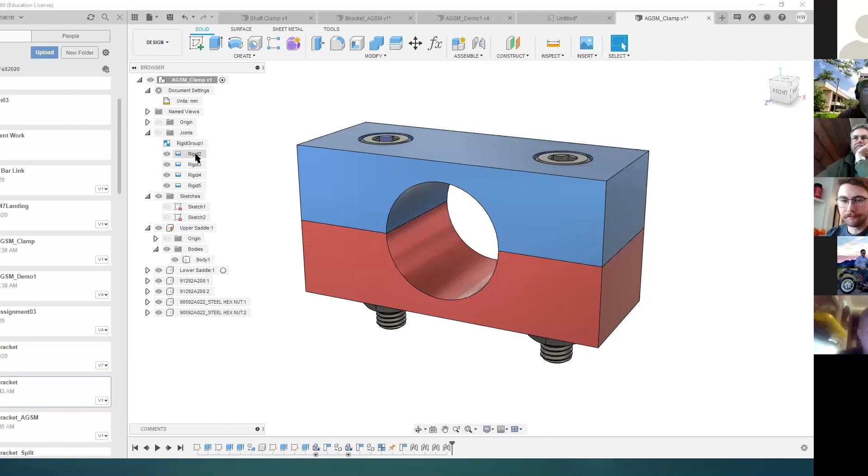I didn't care. If you really want to let things have a little more motion to actually simulate things, I could easily have made this thing a cylindrical joint so that it will allow it to spin and move. So I can drag it up or I can spin it. So if I want to allow motion, I can do that.

If I don't have to, but I can. Notice that I can't get it out of that hole. It's stuck in the hole. It's stuck on its axis, but it can slide and spin. And there are different options for how you can make things actually interact with one another.

You can also do a rigid group, which is what I did on those two parts. Or I could have done an as-built joint. If you look over here in Fusion, there's an as-built joint. I could have done that since I built them literally on top of one another. As long as it's rigid, it doesn't matter. If I wanted these to spin relative to one another, I could have made an as-built revolute joint or something weird. Yeah.

I showed you grounding to keep something from moving. You right click and say grounded, and that component will not move. I suppose you could have grounded the upper and lower saddles and done the same thing as creating a rigid joint.

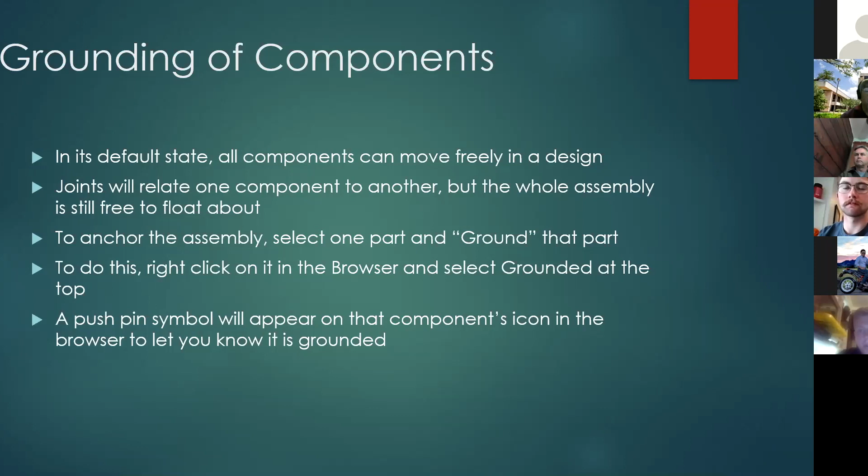We imported files from McMaster-Carr. We used step files and brought them in. Okay, almost done, we've got 15 minutes left.

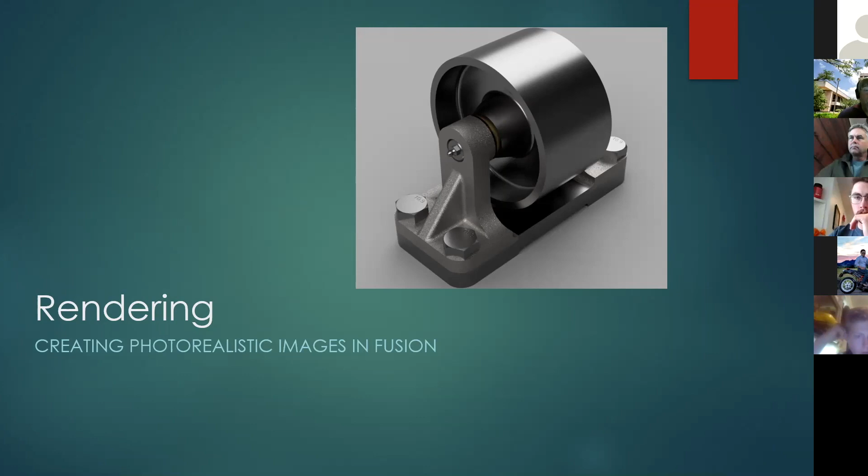So the next question is, what happens when you want to make a higher quality image than what you see on screen? That image to the upper right is an actual rendering out of Fusion. You have to realize it's simply generating things that look like a real world object. In its basic form, what Fusion does all the time is rendering. The high end of the spectrum is special effects like you see in movies, where things look very much real. Fusion hits somewhere in between, and it doesn't animate render, it just does still renders.

It's a whole separate workspace, just like the drawing was. So if I want to make a pretty picture out of this thing, I'm going to say, let's render it.

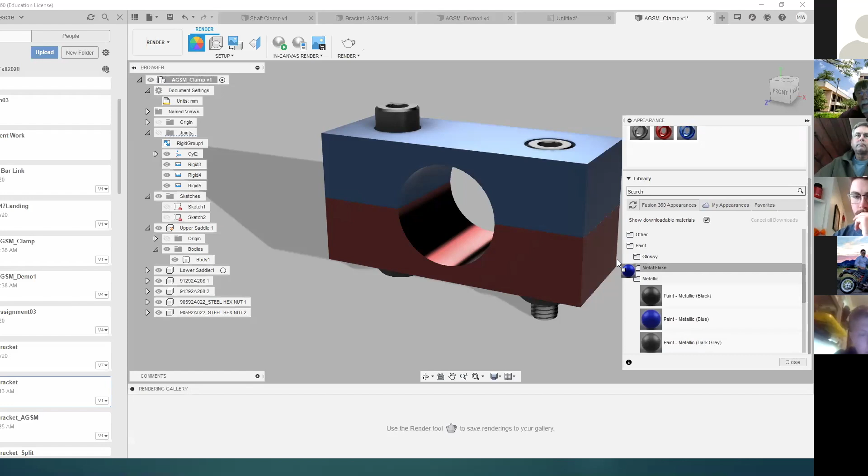Assuming I'm happy with my materials, I'm fine with that. If not, I can go into appearance and say, well, I would like metallic paint. I really want that to be metallic blue instead of just plain blue. And that one should be silver, or whatever, if I wanted to make it out of water.

Suppose you're trying to illustrate a swimming pool or a washing bath for vegetables. I could create a chunk and then come in and tell it, hey, that's water. So there are a lot of non-metallics available out there, woods, plastics. But I set my materials the way I want to have them set up.

The next icon over is scene settings. It says, all right, where do you want to put this and what do you want it to look like? My environment has a bunch of different environments, like a dry lake bed. And I grabbed it, dragged it out, and released it out here.

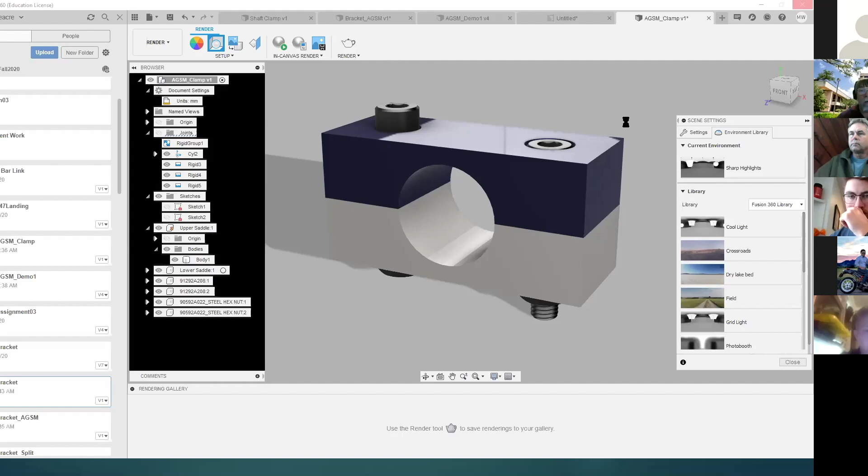You can actually see the reflection of the lake bed on the object now, but it didn't show up before. Well, that's because in my settings I told it I want the background to stay solid. If I tell it I want the background to represent wherever I put it, I can spin my background around.

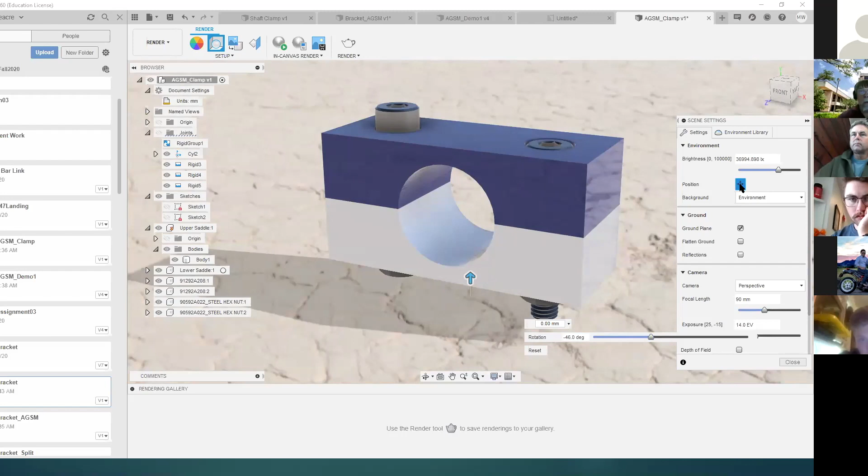I can use the roller wheel to make my object larger or smaller. I can drag the view cube to show the background, to change my angles. I can get everything set up the way that I like it. I can change the focal length of my lens. It's very aesthetic, there's not a good hard rule I can say, well, always use this lens with this. It depends on your object, what you're trying to show, what you want it to look like. But you get it the way you want it to look.

If you want to go through and put a decal on something and you've got an image file, you can go in and add a decal. Once all that is said and done, I hit render.

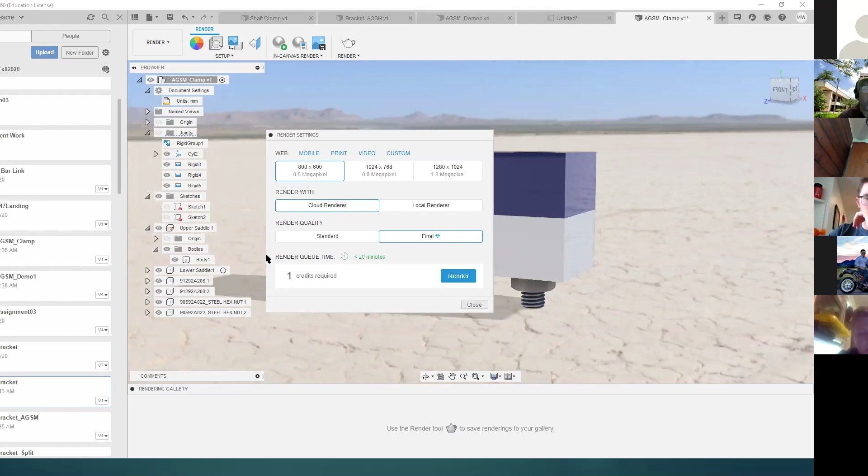Fusion will say, all right, how big do you want it? It's a little bitty one because it's faster. It tells you it requires credits. If you're a commercial industry, you have to buy those. As students, you get an unlimited number of credits, so don't worry about if you went in and picked something that requires 8 credits. I'm not about to render something that big, it'll take forever.

If I do it on the cloud, it'll render out in the middle of Autodesk servers. If I do it locally, it'll render here on my machine. I'm going to check cloud because my machine is about full. So I'll just say render.

Fusion starts to buzz and whirl and think about it, and in however long it takes, it will come back and generate down at the bottom a thumbnail of what this rendering should look like. How long do we have? 10 minutes, hopefully it'll come back within 10 minutes. Because once it renders, you can download that high quality image to your computer and import it or use it wherever.

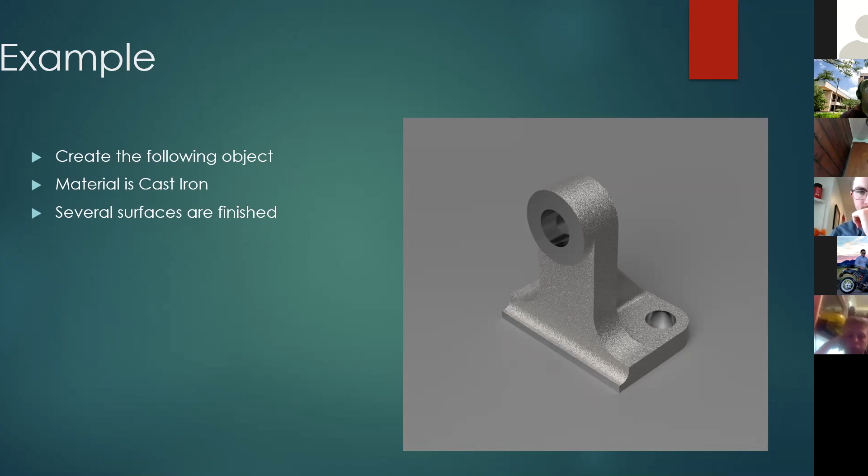Appearances, decals, there's a cast iron thingy. I included this image in the things that I sent to Young, so if you're interested in looking at that one, it's got a decal on it and what I sent, and there are some rendering galleries of that object.

That's my basic presentation, all right? So we've got about 9 minutes left in class time. I'll be happy to field questions while we're sitting here watching this thing render, and hopefully it'll come back before we finish.

If there's anything you have to say, Colonel McGee, while we're sitting here watching this render, we can take the time. I want y'all to treat this as a resource because you've got this video that takes you step by step through creating these drawing objects, and you've got the slides to go through the steps. Together, this is a resource you guys can use to really up your game in terms of visual communication.

This is something y'all can work on over your really long December break. I'm going to have a lot higher expectations in the spring for some of your communication via the drawings. So y'all practice this.

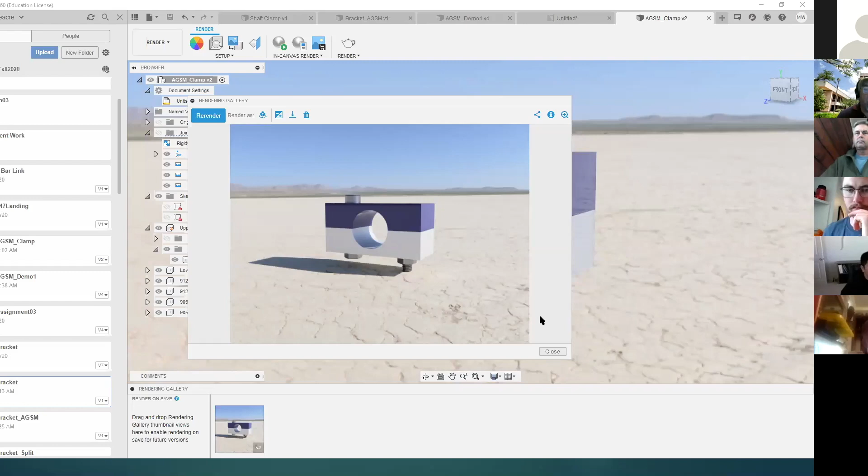That saves it to your computer, and then you've got an image file you can do whatever you need with. If you needed a different view, you change your viewpoint around and render it over again. So that's what I got.